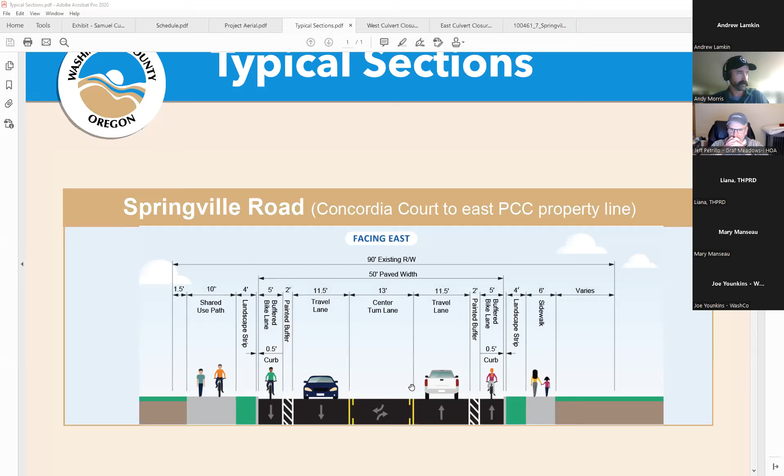On the first piece, Concordia to the east line of PCC, on the north side we're going to continue with the 10-foot shared use path that we had in the Springville project phase 2 to the west. On the south side, we're going with a 6-foot sidewalk, separated by a landscape strip.

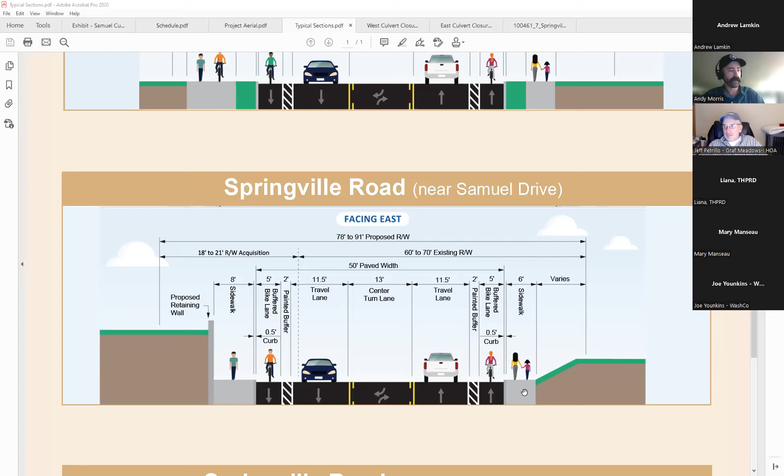The next section, kind of the pinch point, is around Samuel, a couple hundred feet either side of it. On the north side, as you work east, the 10-foot shared use path would drop down to an 8-foot sidewalk with a significant retaining wall on the north side of the road. On the south side, we'd maintain the 6-foot sidewalk without a landscape strip.

Moving east, away from Samuel, across the east culvert and working up towards Joss, we have an 8-foot walk on either side. This 8-foot walk will carry across the limits of the existing wall that's out there now, and then we would tie back into the existing sidewalks that run up to Joss.

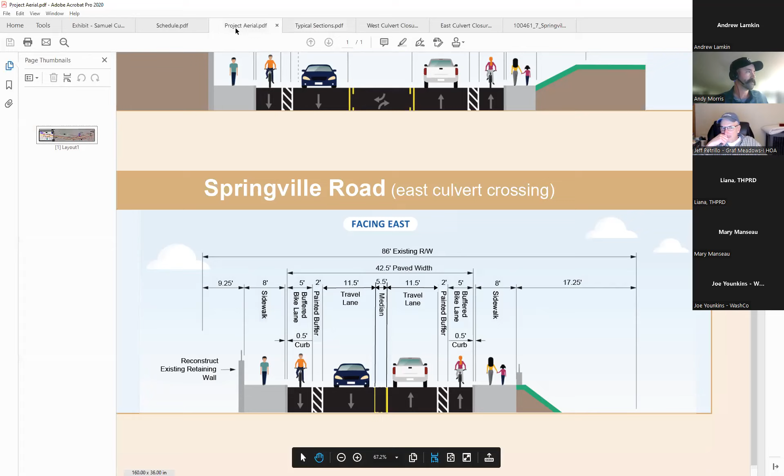Jump onto the project aerial. Give this a second to load. There we go. I'll just kind of hit the high points.

Starting at Concordia and working east, there's an existing couple of culverts here that are undersized now. Those culverts are going to be replaced with an 8-foot wide, 4-foot deep box culvert. In the bottom of the culvert, you're going to have roughly 1.5 feet of stream bed backfill. ODFW designated this stretch of tributary to Bethany Creek as needing to be fish passable, with walls on either side of that culvert.

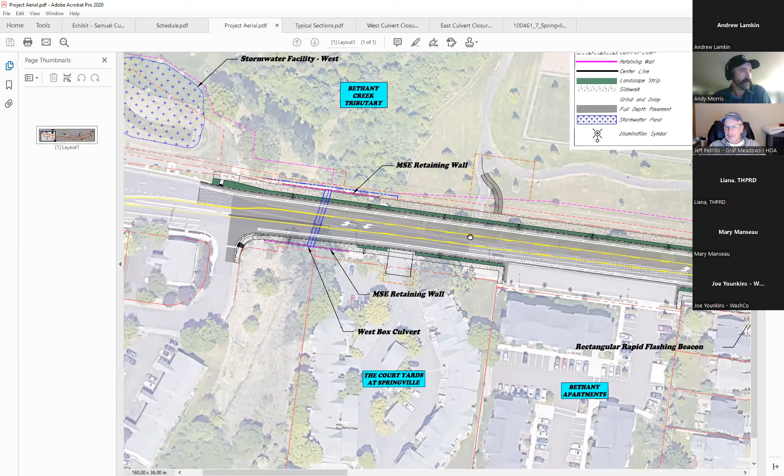As we move down, you can see the 10-foot shared use path, and we're making connections back into the existing THPRD PCC paths there.

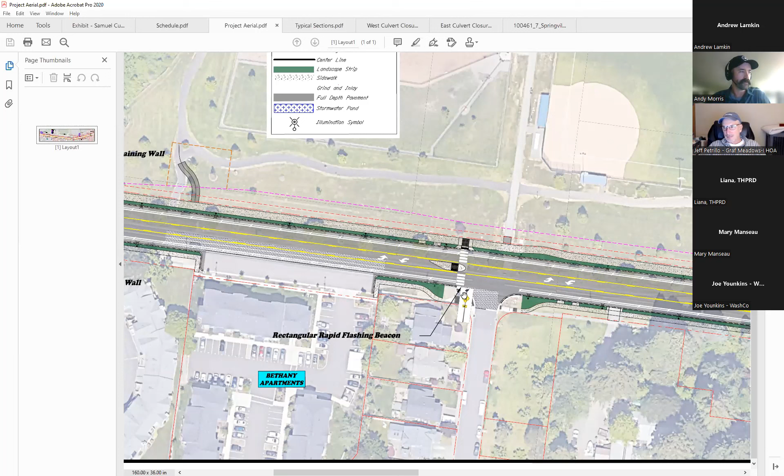Working down to the east, we're at 173rd, and there's an existing rectangular rapid flashing beacon. The road obviously is going to get significantly wider here, so we'll add a refuge island in the middle, but the enhanced crossing will stay.

Moving further down, we're looking at Samuel here to the south. This is Jeff Petrillo - could you scroll back just a little bit and explain what will happen to the existing trees on the north side that are part of the PCC campus or the park system there?

Sure, there's those semi-mature or mature trees there - the front row of maples right now that are on the back side of that ditch. They would all be removed with this project. In that landscape strip that runs along this frontage, we would be putting new street trees in. Thanks.

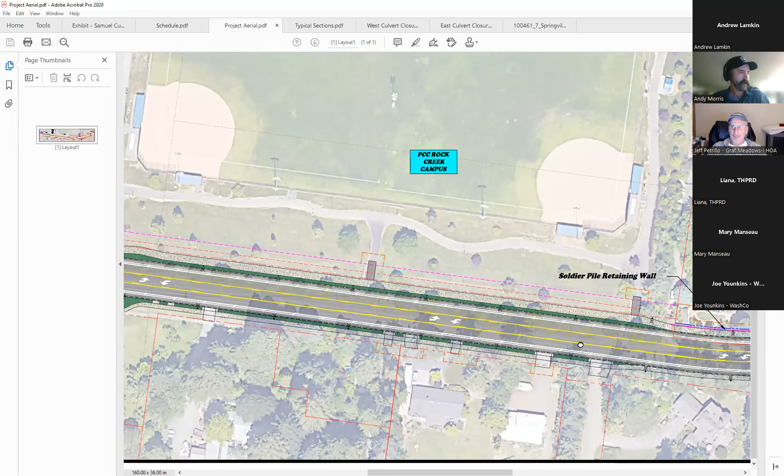We'll talk about trees too as we move down here. There are some significant firs on the south side coming up to Samuel that are right along the existing ditch, and right now the plan is to remove them - everything, the ones that are inside the right of way anyhow.

So it's Samuel here, and across from it is the significant wall I mentioned earlier. This is going to be a soldier pile wall that goes in here, upwards of 10 feet tall. The crossing shown at Samuel is shown here to be a marked crossing, and it should not be - it will not be marked with this piano key style or bars. There are no plans to do an enhanced crossing at this location.

As we move down to the east, we have another box culvert on Bethany Creek, and this one's larger - 10 feet wide, 4 feet deep again. We're looking at 25 to 30 feet of excavation to get down and replace the existing culvert with a fish passable one.

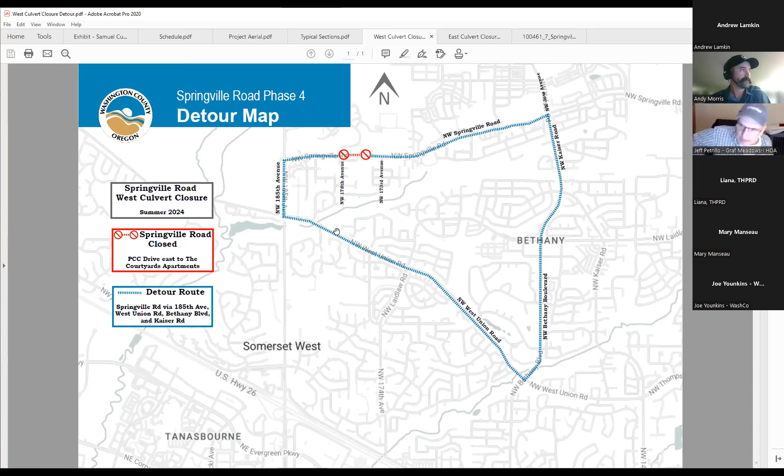90% plans should be complete around February, the end of February of 2023. And then the 100% plans, we would be looking at September of 2023. And then bidding winter of '23-'24, and then starting construction, I would say in late spring.

There'd be work we could get done ahead of the culverts. Something else I should probably add in here too with the trees is early tree removal.

My plan would be to bid the tree removal project wide, separate, ahead of the actual contract construction starting. There's a few reasons for that.

One being permitting with the Migratory Bird Act. So we need to have those out, anything that they could nest in, removed ahead of the middle of March.

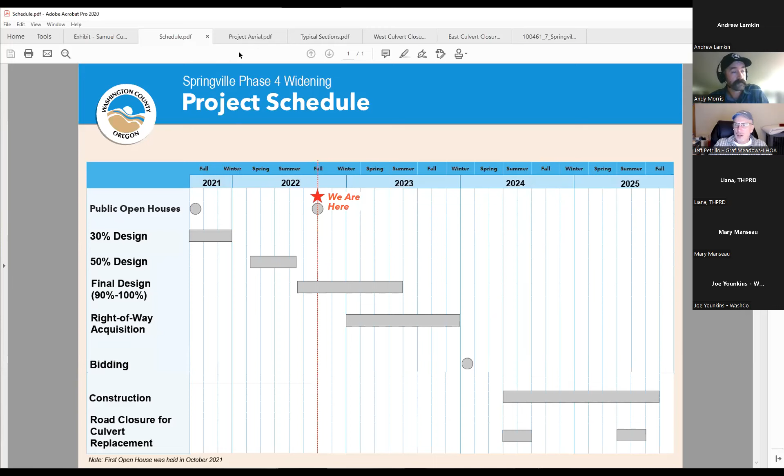Could you go to the Samuel section? Sure, right here. Yeah, and I think there's somebody with a question. I cannot see the question. No, I'm sorry, they're putting their hand up. Andy, could you elevate or recognize them? I think it's Pat Christensen or Larry Christensen. I am not sure how I do that. Well, no, I'm sorry, I got it.

Yep, or Andrew, Pat, you should be able to talk. Yeah, Pat or Larry, are you there? You have to unmute. I've asked Pat to unmute, but let's see. Just in general, if anyone has any questions, put your hand up, now's the time. Pat, we can't hear you if you're trying to speak. Oh, there we go, unmuted. You should be able to speak now. Hello, Larry, Pat. Nothing heard. Okay.

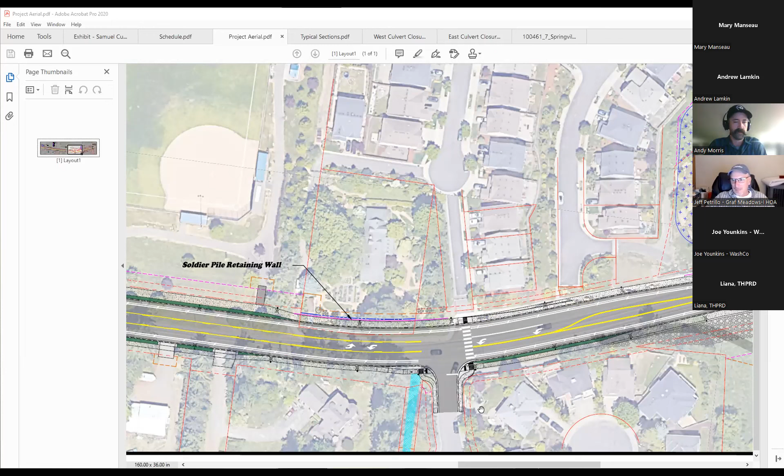Yeah, the signal at Joss is gonna be nice. Mary, you have your hand up. I do have my hand up.

So Andy, can you describe what a soldier pile retaining wall is and how that's different from other retaining walls that we may be familiar with?

Sure. A soldier pile retaining wall starts off with an augered hole, and then the augered hole is filled with concrete, and set in the concrete is like an H beam or an I beam. Between those I beams, big wood timbers get dropped in and set in there, and then a concrete face is put across the front.

So is it similar to the walls that are on Bethany Boulevard between the freeway and West Union? I think what you're thinking of there is sound walls, right? Yeah. So we get a lot of traffic through here.

But why have they eliminated the lighted crossing on there like we originally talked about in the sound wall discussion for the soldier pile wall? Yeah, I think there are two major issues.

Let's see, I think Pat is coming through here. Alright, yeah I think so. Pat is finally coming. Okay, just muted for a second. All good.

Well, the soldier pile wall is a retaining wall, so it will actually retain the soil to the north. And it's a less intrusive wall as far as the excavation behind it, compared to say a block wall with tiebacks.

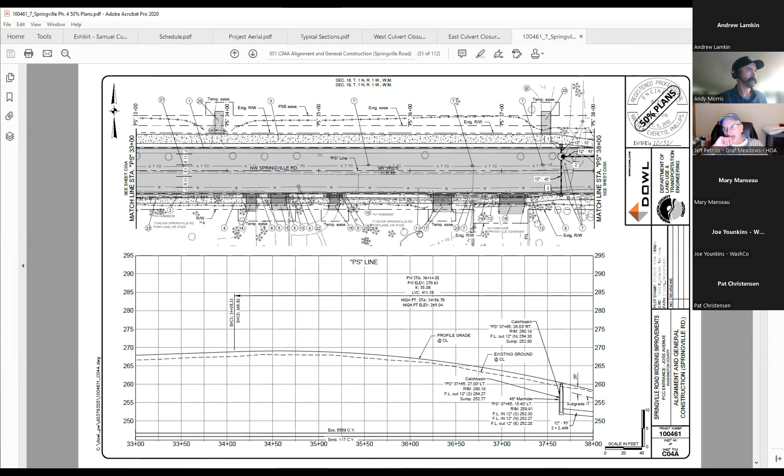Yeah, no, I'm going to jump into the plans here and I can get to it fairly quickly. And it also - here it is. Geneopolis may have a concern or just comment on it. Yeah, so Geneopolises are here on the west side, and the blue hatching shown in that last project aerial is this hatched here, and that's the existing driveway that comes out right at Samuel.

We cannot get the ADA access across Samuel legally, a legal access or crossing for them with this driveway there. And obviously that creates a safety issue having a driveway immediately adjacent to Samuel. So what we're showing doing now is removing that section of driveway and bringing that property owner in, come down Samuel, and I believe this is called Elwood, this little stub out like for future, and wrapping them back in here.

So yes, it would be one more person using Samuel. Thank you for showing that. Sure.

I think there's a written comment in the chat from Geneopolis. Andrew Lamkin, could you verbalize that? I can't access it really easily. Let's see - it says, we have continually said that the driveway should access Samuel in front of the property, as was intended when the house was permitted.

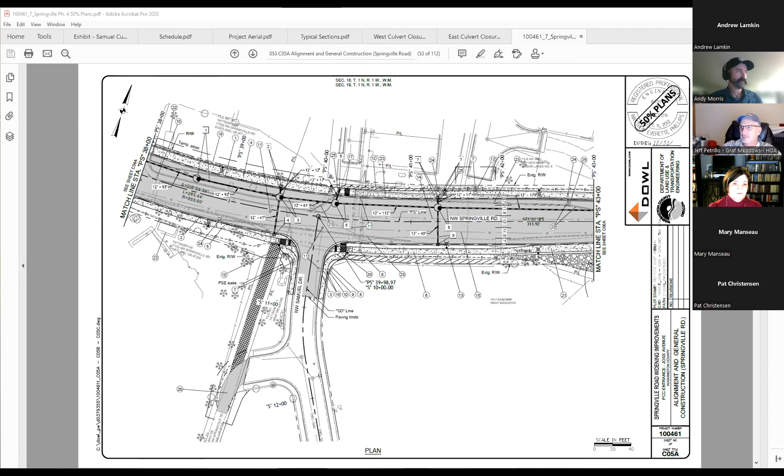Is there a real reason that the storm drain lines are under the roadway in lieu of under the sidewalk? I'm not sure, they're traversing both underground, aren't they? I'm not understanding the question. Why is the storm line running down the road and not inlet to inlet off the side? Okay, some of that has to do with getting around utilities, some is existing footprint, but this storm system will end up, when we're done, being owned and maintained by Clean Water Services. A lot of what I've seen recently is they are liking the storm main itself to be in the road and not go from inlet structure to inlet structure off of the curb.

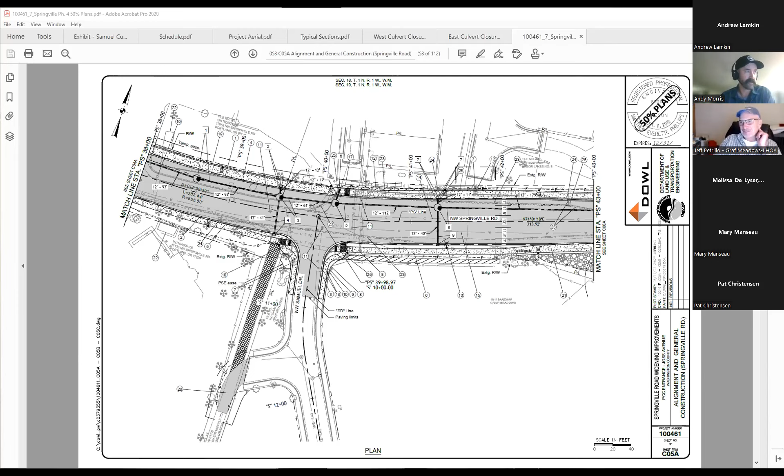And then somebody asked about what fish are actually traveling under the road and where are they going. Well, on the west one, I couldn't tell you. It's cutthroat trout is what I last heard, and they don't necessarily need to be there today, but if they were traditionally there, it's all the development over the last 100 or so years that put in barriers for these fish. I've been part of quite a few bridges and culverts at the county, and when you make the improvements, the wildlife does come back.

Can you hear me now? Yep, okay, am I there? All right.

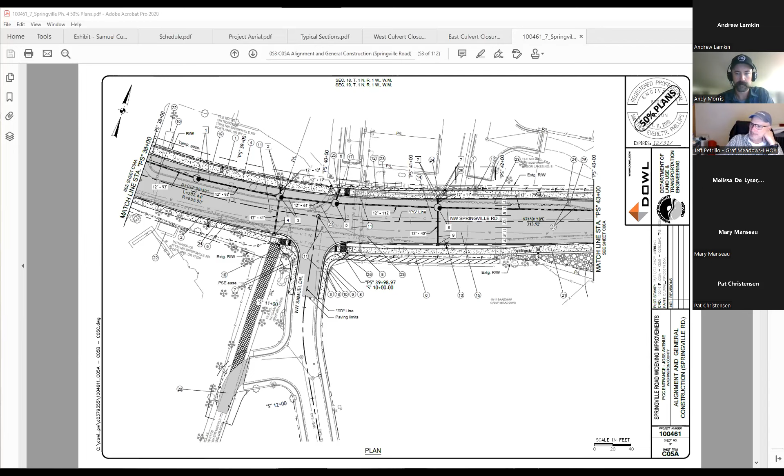One of the things that I was concerned about, Andy, is we had talked about that crossing going across Springville Road. For some reason, I get a lot of feedback here. Larry, we can hear you, continue.

Okay, the thing that we're concerned about is with this road down in the lower part of our subdivision, and the bridge that was just recently completed here a couple of years ago, and we're on the bike path as well as walking paths. This gets a lot of usage today.

And with this improvement that you're putting in on Joss with the traffic signal, that may help stop traffic in between, heading from Joss Road over to the college. But when it gets dark at night, people aren't going to see people walking across that section to go into the north subdivision and walk into the ballparks and things like that.

I really think that this needs to have a lighted situation like is further east on the roadway. That seems to be real productive, and it's real easy to see people crossing in the evening. I think it would be very beneficial for people using that to have a lighted walkway in there.

Okay, I will get a formal response out of traffic engineering. As far as lighting's concerned, I know what you're talking about. The flashing light gets people's attention, but that intersection will be lit with street lights, similar to what you see on the recent projects either side of this one.

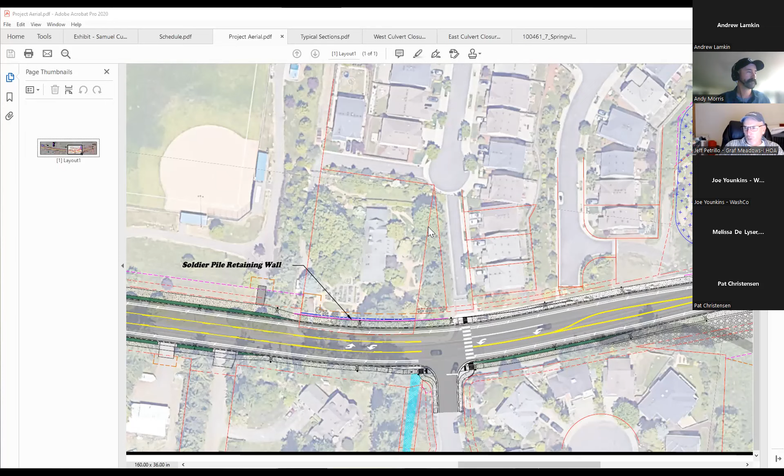Okay, I think our last topic, we have 2 minutes. The last topic was on the matter of CPO officers and staff for next year. If there are any interested people out there listening, please get in touch with us. If anyone would like to volunteer for a position or nominate themselves, this is our election meeting, so please put your hand up and let us know. I'll give a couple minutes and then wrap up.

Andrew, I think one of the things that needs to be stated is if we do not have officers, we will not have a CPO7. CPO7 will go dark, meaning no Facebook, no monthly meetings, no agendas. We need people to step forward if people want to have a CPO.

I will say it's been an enjoyable time here. I've appreciated the opportunities that CPO7 has brought to us, and I really enjoy learning about these projects and everything else. I certainly hope others feel the same way. The only reason I'm stepping down from the chair role is with 2 children now and full time work, it's really difficult. So it's been 2 years, and we thank you for that service. I kept the lights on as best I could, and I think we got lots of good work done in the meantime.